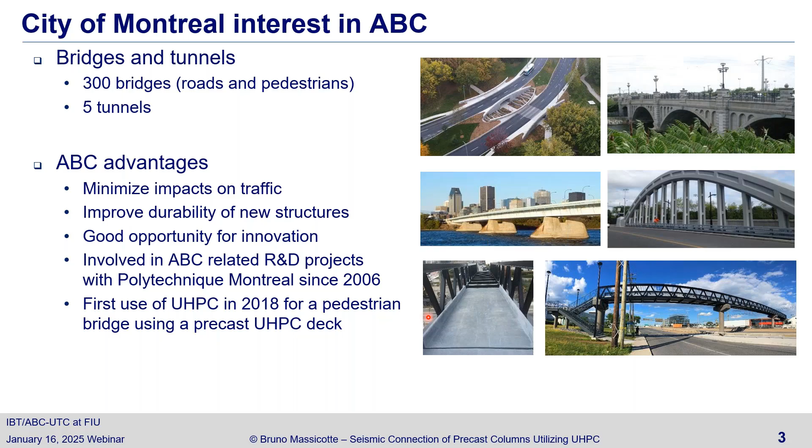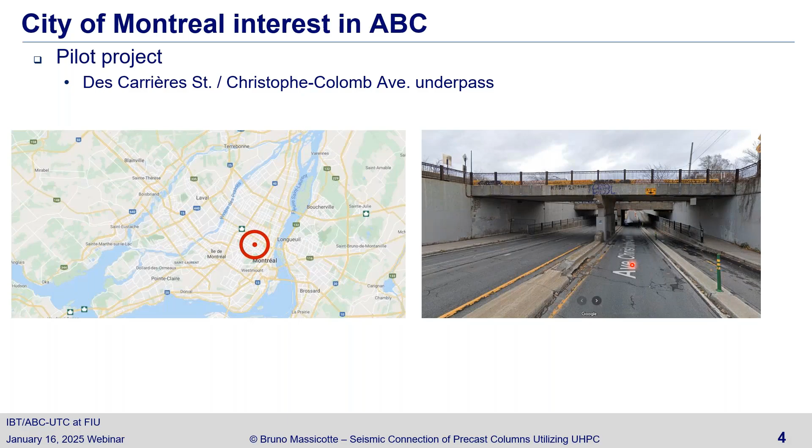So we decided that while replacing the bridge, we'd take the opportunity to review the configuration to make it safer for people. As you can see, it's one of the main roads that goes under the train tracks. In Montreal, the train tracks traverse all of the city, so this type of underpass, we have about 10 to 15 of those, and they all need repair. This was the first one we tried to replace.

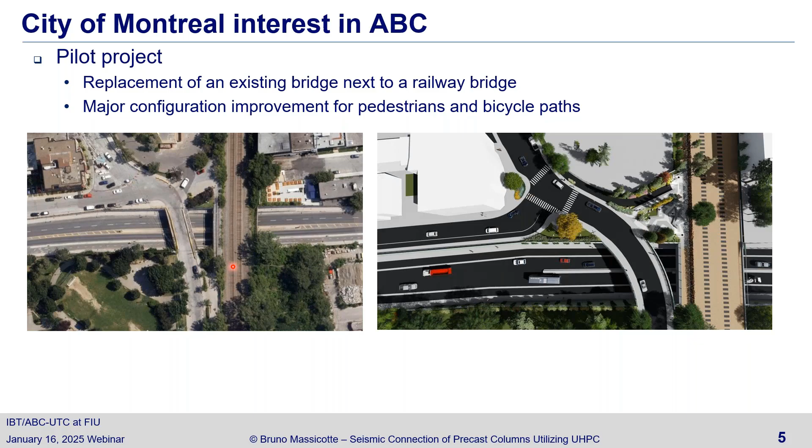So it's our first ABC project. As you can see, we tried to make it more beautiful for the people living in Montreal. It was all concrete and really degraded, so we did a lot of architectural patterning and tried to make it a more livable space.

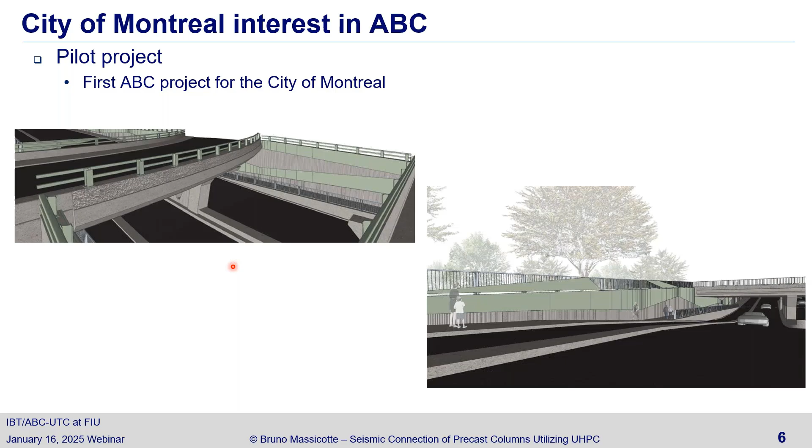When we wanted to do ABC Montreal, we decided to take that site. It's not a site with a lot of traffic problems. The roads end up near a park, so it's more of a local road, but it still represents what we're going to have to do with the other underpasses.

And we didn't make it easy, so we took a complex geometry, curved and skewed. We had a limited number of similar elements, so the precast elements were a lot of trouble. Also, we had low clearance of the roadway, so doing precast was really interesting to get better clearance. We wanted to do 100% ABC for the bridge. The abutment and retaining wall were kept, but the bridge was 100% ABC from footing to the barrier wall.

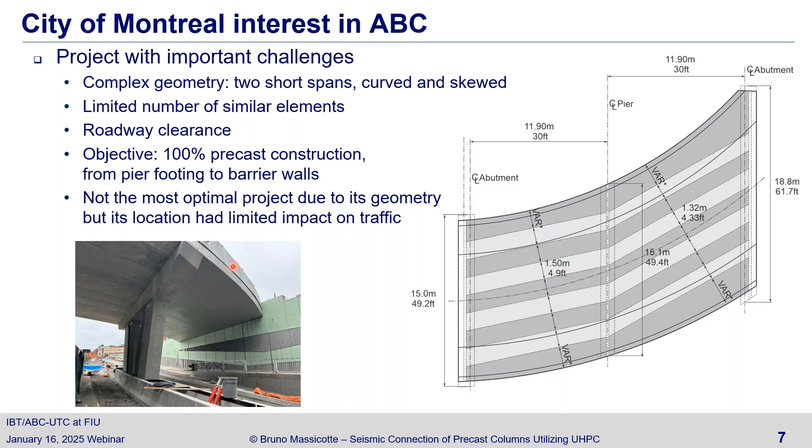That's it, and now I'm going to pass the mic back to Bruno. Thank you, Dominique. So, some background information.

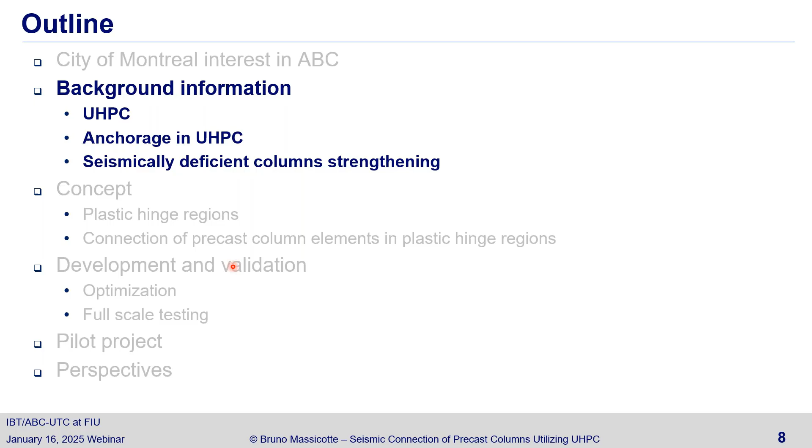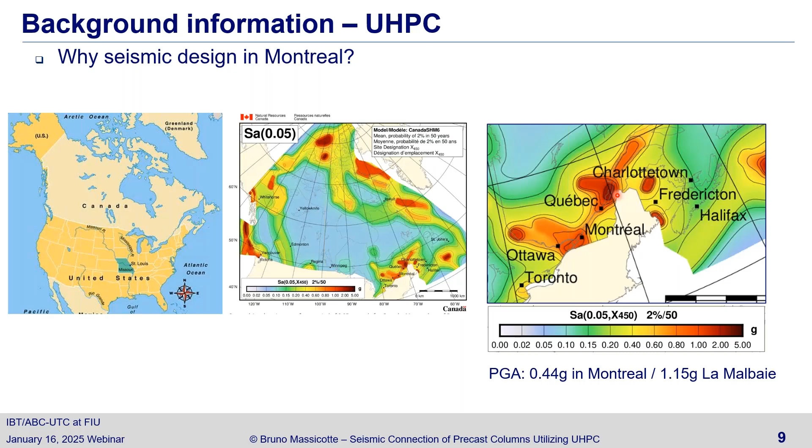That area can have very high seismic events. The return period for seismic is about 150 years in eastern Canada, and it's been 100 years this year since the last big one occurred, so we're getting ready for the next big one.

What is UHPC? For those who are not quite familiar, it's a cement paste in which we put fiber. The Europeans call it UHPFRC, which is the same as UHPC, the acronym we use in North America. Its main characteristic in compression is about 125 MPa.

I'll be switching from SI to American units, but I've put the soft conversion in many places. This is its characteristic in compression, but why do we use this material? Mostly for the tensile behavior, which is around 14 MPa, or 2 KSI, for a conventional fiber concrete, UHPFRC. For example, on this side, it's UHPC with 2% fiber content, so it can reach stress as high as 14 MPa, or about 2 KSI.

The beauty of that material is that if you look at the stress-strain domain, once the matrix cracks, you have a lot of strength and a lot of ductility. So this is what we're using.

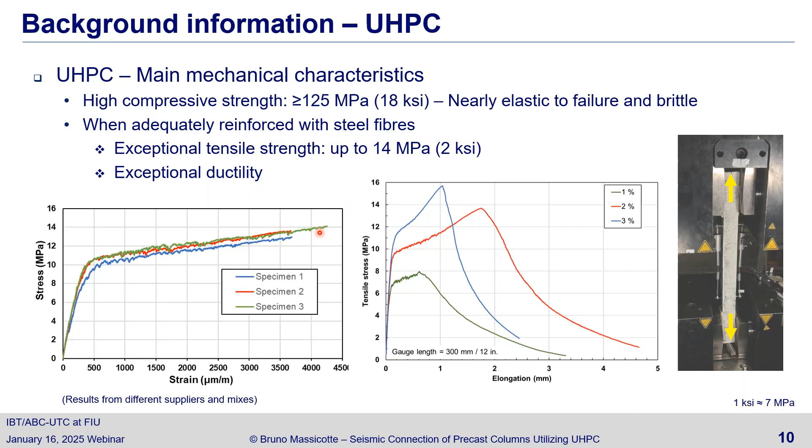If you pull on a series of bars in a joint where bars are lapped, that puts a lot of pressure on the concrete and induces cracking in the material. With UHPC, there's no crushing on the ribs here. It's mostly the tension of the material that governs the behavior.

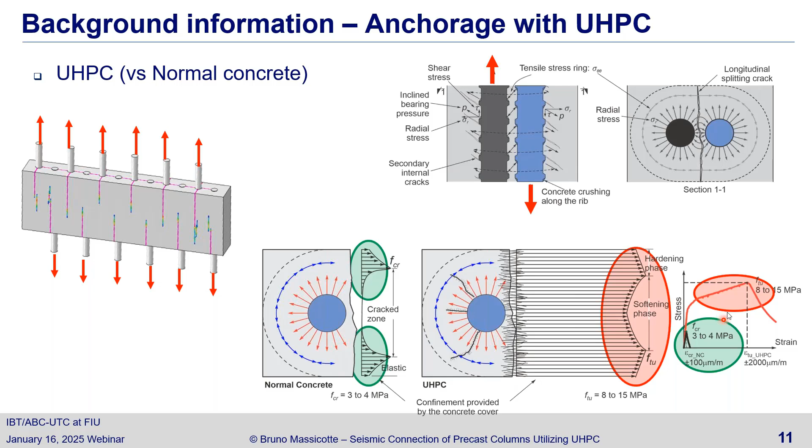If you look at normal concrete, you get little confinement or confining effect, because normal concrete has very low tensile strength. However, with UHPC, you get very high tensile behavior and ductility, which helps provide very good anchorage, significantly higher than the confining stress of normal concrete.

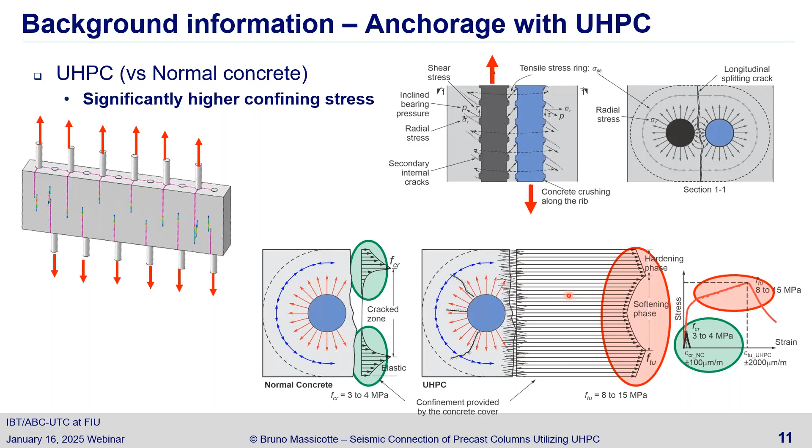So if you pull on a bar and look at what kind of stress you can develop, you can see that for an 8 bar diameter of anchorage, you can reach stress around 60 KSI, enough to yield the bar easily, and for a 10 bar diameter embedment length, you can break the bar.

So it's very efficient, and this is for conventional commercial concrete. It's not on the upper high side of this material.

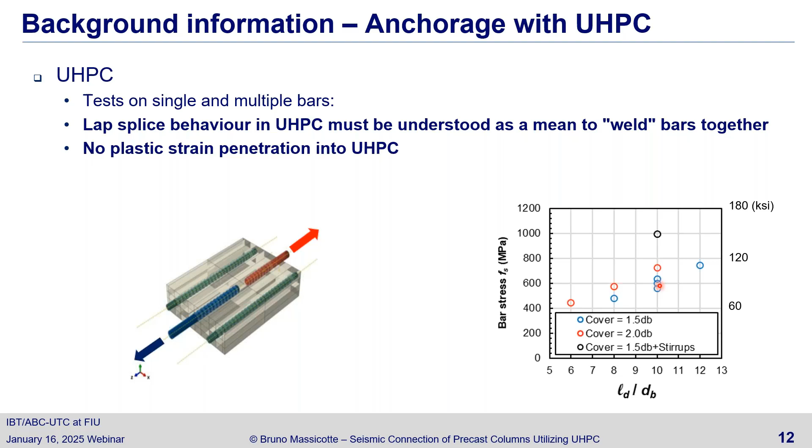So lap splice behavior in UHPC must be understood as welding the bars. If you put two bars lapped in UHPC, they're welded together. That's the way to see it. There's no plastic strain penetration into UHPC because the stress varies linearly and goes down quickly into the bar. So it's not like conventional concrete.

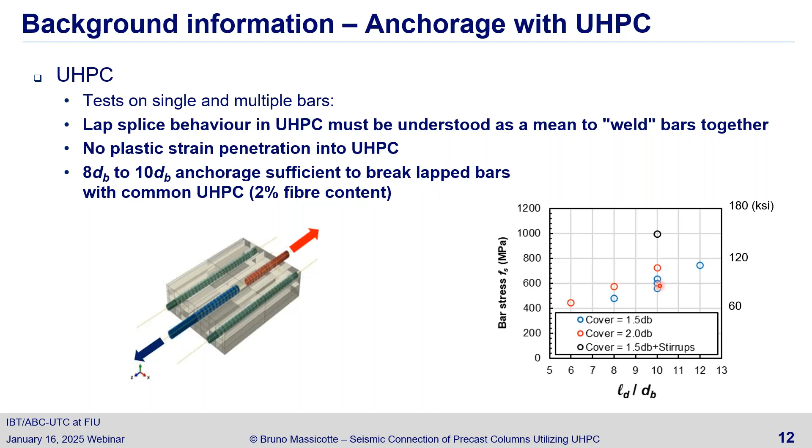As mentioned before, if you have the 8 to 10 bar diameter anchorage, it's sufficient to break a normal reinforcing bar with a 2% fiber content of a commercially available UHPC.

So that behavior, actually, before knowing everything that I had, about 15 years ago, I had the idea that it could be used to strengthen existing bridges where you have a bridge pier that would be very deficient for seismic behavior.

What I did was replace the concrete in the lap splice region, just remove the normal concrete and pour UHPC without modifying anything. Nothing, no additional stirrups, no 135-degree hooks, nothing like that, just replace and see what I got.

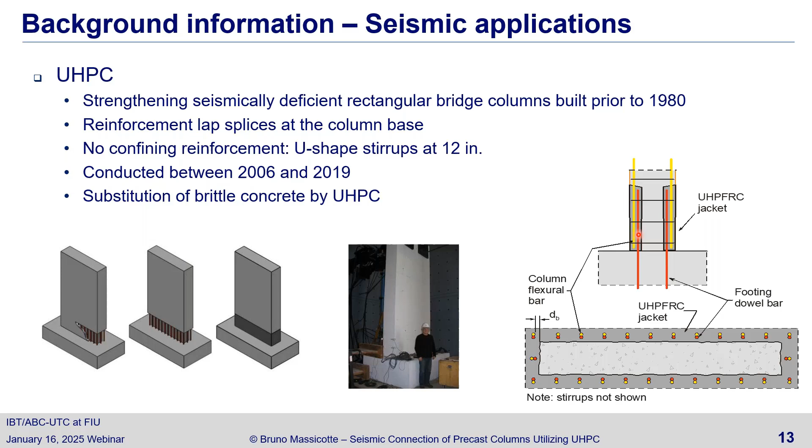And I got something. This is a control column in black here, and my first column in red. It was so good that I was not even able to break it because the actuator didn't have any stroke left.

In the coming years, I looked at the improvement given by UHPC on a lot of columns. However, in that project, I was using 20 bar diameter as lap splice length and 3% fiber content, so it was not optimized.

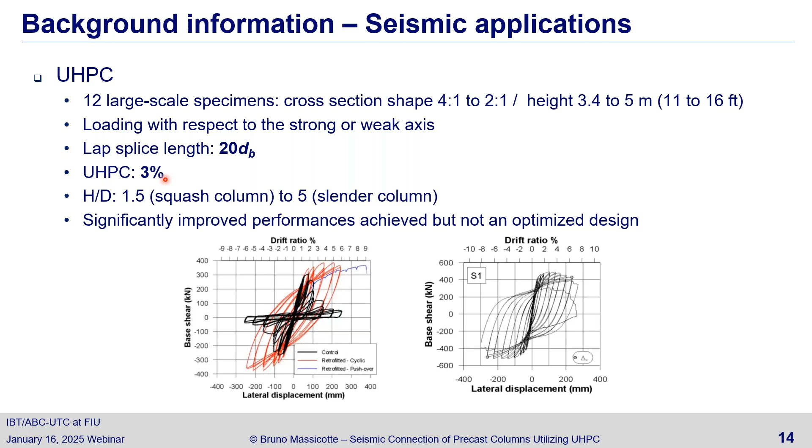So I thought, if it's working to fix a deficient existing column, could it be used for precast columns? So that was the idea.

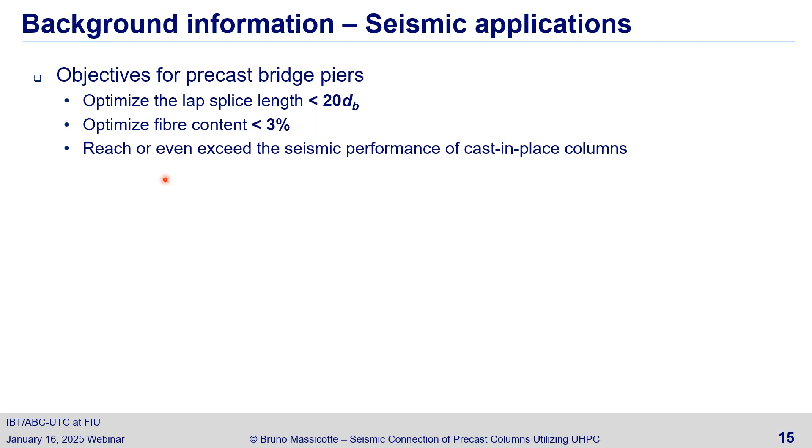So the concept is as follows: if you take a cast-in-place column, a simple column, and look at the behavior in the plastic hinge region, if you have a short column, the plastic hinge will be spread out half and half, half in the footing and half in the column.

This is given by this equation here, in SI units or American units. Roughly, the plastic strain penetration within the footing is about 10 bar diameters for conventional reinforcement. That equation is the one given by the AASHTO or NCHRP document to compute the length of the plastic hinge for calculating column behavior.

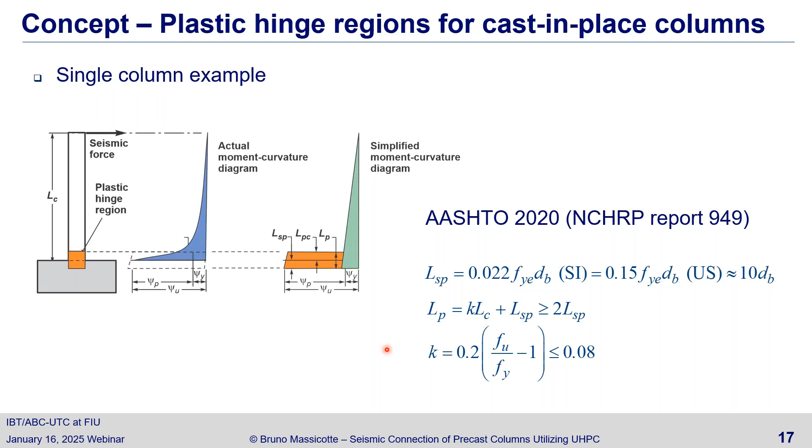Using that idea, now if we make a precast element in which the bars - the red bars here are those coming from the footing, replicating what I had for the existing column - and the blue ones are those coming from the precast element. They can be lapped in the same plane as shown here, or they can be offset if you want.

So when you do the design, you can choose whatever you want. Usually for an existing column, they will be in the same plane. For a new one, the offset will be preferred.

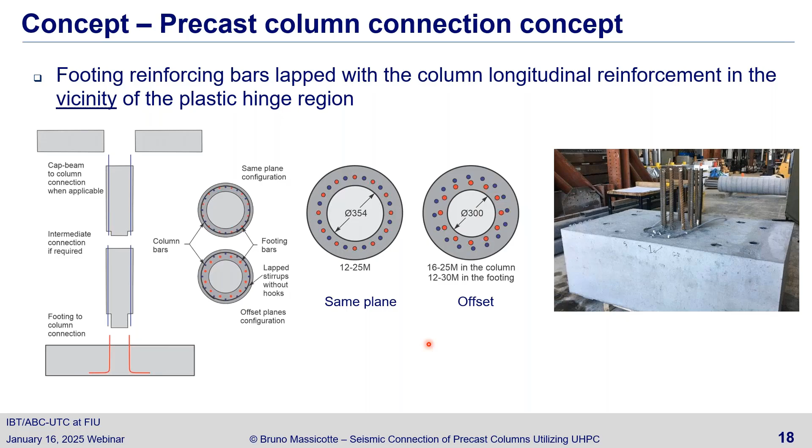So this is the idea, to lap the bars that way. As mentioned here, all the pictures are not coming from the same element, so you can see the bars are not exactly the same from one picture to the other, but you have the bars coming out of the footing here.

Then you put some hoops here, and you have your precast element with the longitudinal bars, and then you just put the two elements together and pour UHPC, and that's it. That's no more difficult than that.

One good thing is that with UHPC, since you can reach 400 MPa or 60 KSI with a lap splice of about 8 bar diameters, you don't need to use hooks at the end of your bars. So it makes the details much easier to put in place when you lap bars in UHPC, whatever kind of bar you have.

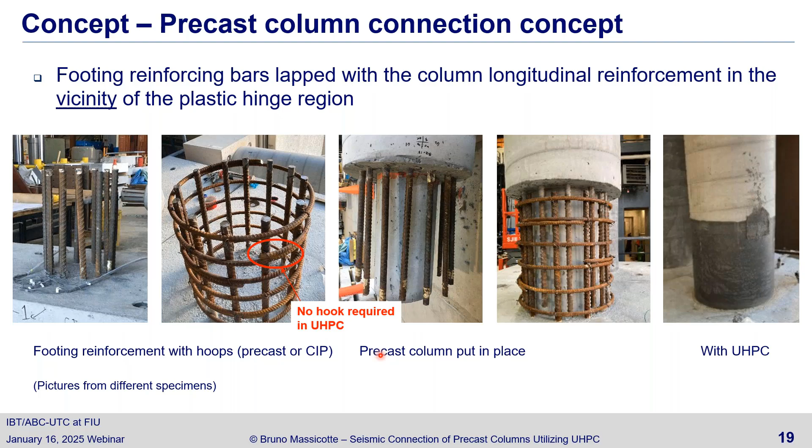So to follow the usual way of doing seismic design, you make sure that your ductile elements - the reinforcement at the bottom here in the footing - yields, and you get the ductility from that reinforcement. For the part of the column above the joint, above where the plastic hinge region would be located, those elements are protected. So for the same load level, you will remain nearly in the elastic regime, which allows you to do whatever you want for that element.

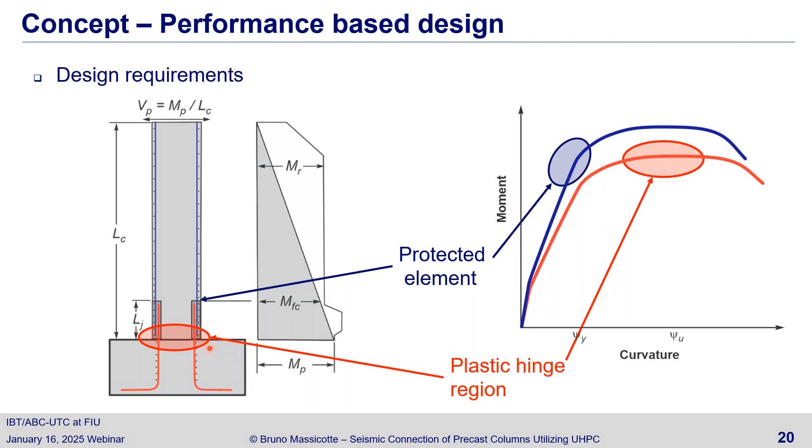You can use this as long as the element remains in this region, so you make sure that all the plastic deformation occurs at that location. Comparing the cast-in-place and the precast solution, the portion of the plastic hinge, the strain penetration within the footing, remains the same. If you need more, depending on the seismic zone and the displacement demand, you may have to extend the plastic hinge within the UHPC. However, as I said before, that cannot be done because UHPC has limited plastic strain penetration.

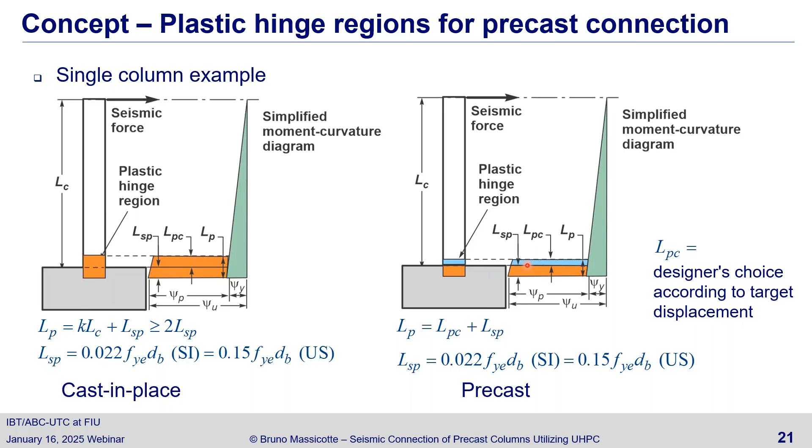So we have two solutions. If plastic deformation occurs only in the footing, this is the configuration you may have. But if you want more of the plastic hinge to extend above the footing, then you can use a sleeve and increase the length of the plastic hinge.

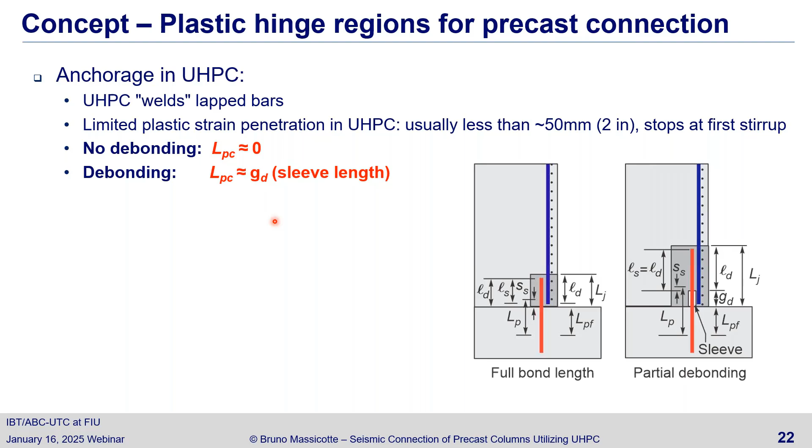Our experience says that if there's no debonding, when you do your computation, you assume there's no plastic hinge within the UHPC. If you use a sleeve, you use that length, and you can select whatever length you want to meet the prescribed displacement. As I said initially, this solution was not optimized for the strengthening of columns.

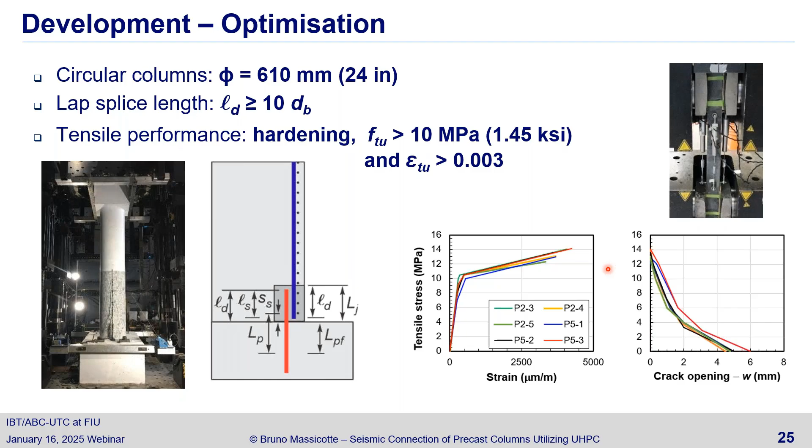We had a control specimen, and it took 4 specimens to optimize the design. So this is the result we're going to talk about. Just to say that these columns had an axial vertical load, and the percentage of reinforcement for that column was 2%, which is quite common for seismic application.

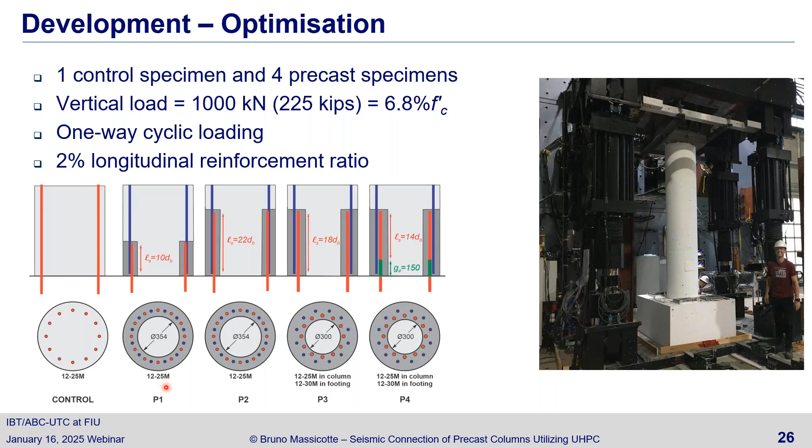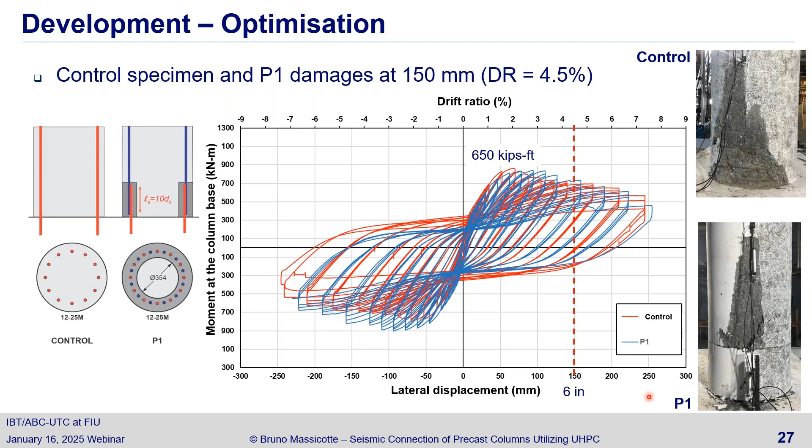Here we're showing the damage to the column at 4.5% drift ratio. We can see there's spalling in both columns, but that was expected. If you want to eliminate spalling though, I'm going to move to specimen P5 now, the last one we tested as a circular column.

In that one, we made sure that we used some sleeves just to see how they would behave, and we made sure that the plastic hinge would occur only in the footing region and within that sleeve, with no damage or spalling to the concrete in the precast element. That was our target, and this is what we got.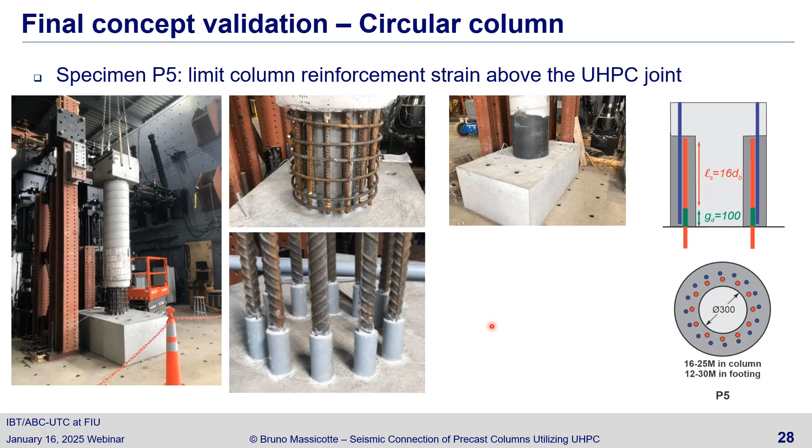This is the kind of behavior we got, again with the same control specimen. The amount of reinforcement was a bit higher for the P5 column, but in terms of behavior we got a very stable response up to a drift ratio of 5%, which was good, with very little damage as you can see here in the precast element.

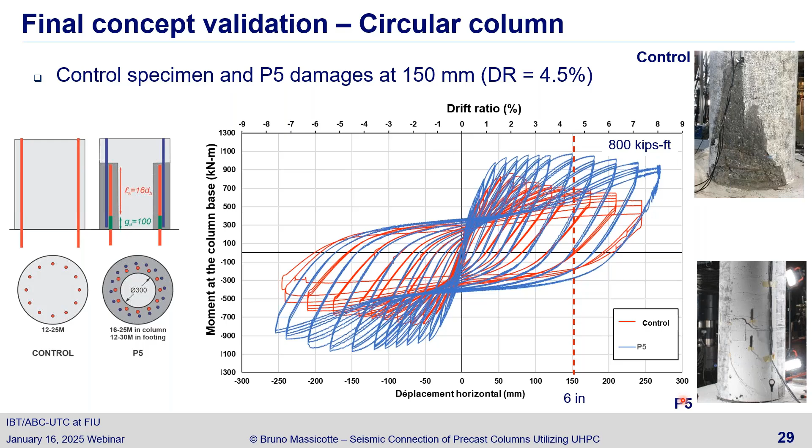If you look at the usual range for which you would design a column, and compare the damage between the control column and the precast one, there's no damage in the precast one. This means that after a very severe earthquake, with this type of design, if you carefully do your design, you will end up with no apparent damage, no crushing, no spalling in your precast element. You will concentrate all the plasticity and damage, with very stable behavior, into the plastic hinge region, hidden from view, so you will have a column that won't need repair.

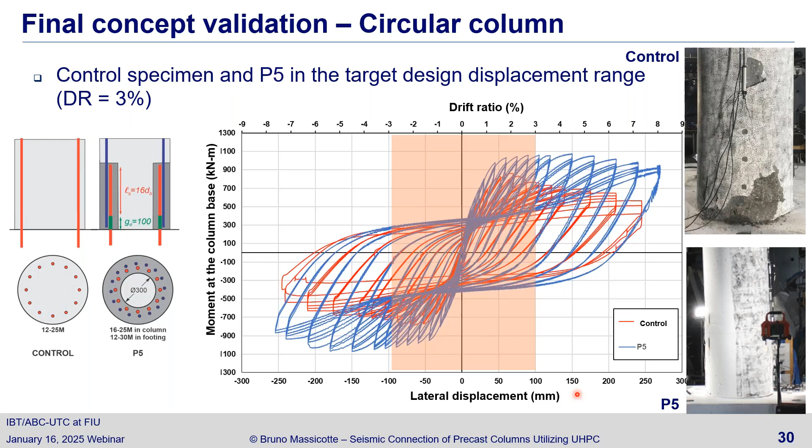The final concept was validated on the pilot project briefly presented by Dominique before. This bridge had some architectural features, because Christophe Colomb is Christopher Columbus, who sailed to North America.

So the architects thought some sails would be nice. They're not structural, and even the columns are too big for that small bridge, because you need a column sized to look robust, but actually they're a bit too big for the size of that bridge.

The specimen tested in the laboratory was actually designed for a bridge more than twice as long as that bridge, a much bigger bridge. So the columns we tested had capacity for seismic design for a much larger bridge.

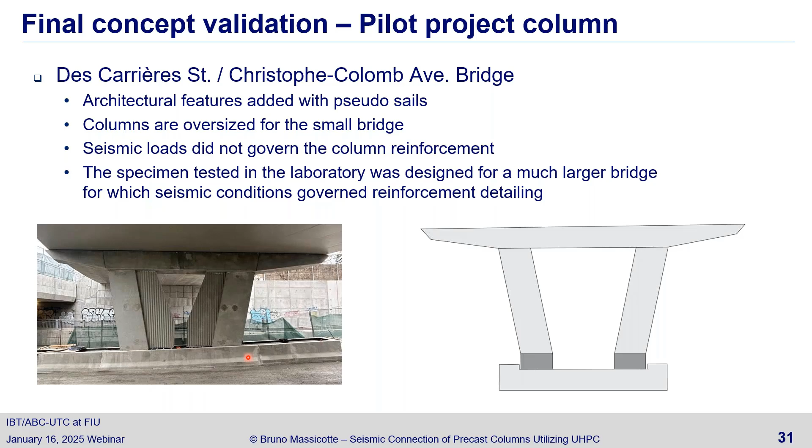Because of the size, this is about 20 feet here, where the lab space is a bit less. So we tested a column that was somehow close to half of the actual column size.

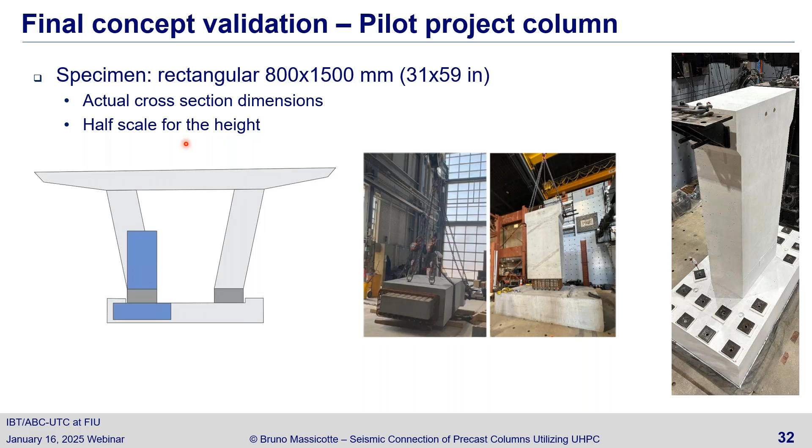But we kept the same dimension, the same size of the column. So this is what we see here. We had bars coming from the footing in red, and bars going into the column, so all the yielding and nonlinear behavior will be in the bars coming from the footing.

We also used sleeves here just because the column we tested was not exactly the one that was built. It's actually much stronger in terms of seismic behavior, and because we kept the same length as the designer, it was 18 bar diameters, which is a bit too much, but we kept that value for the testing.

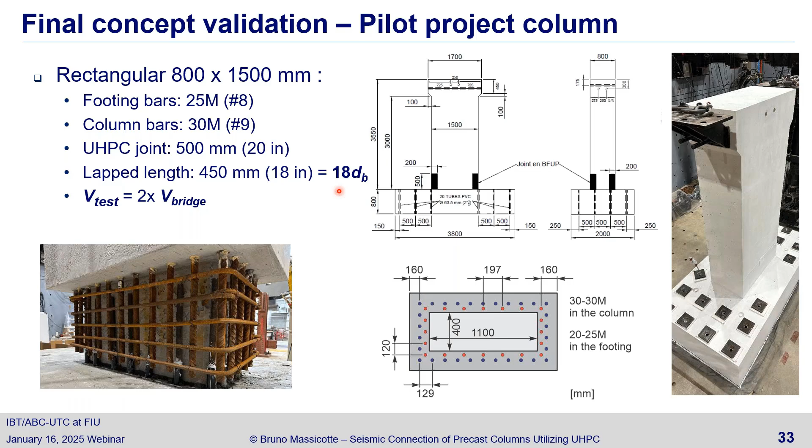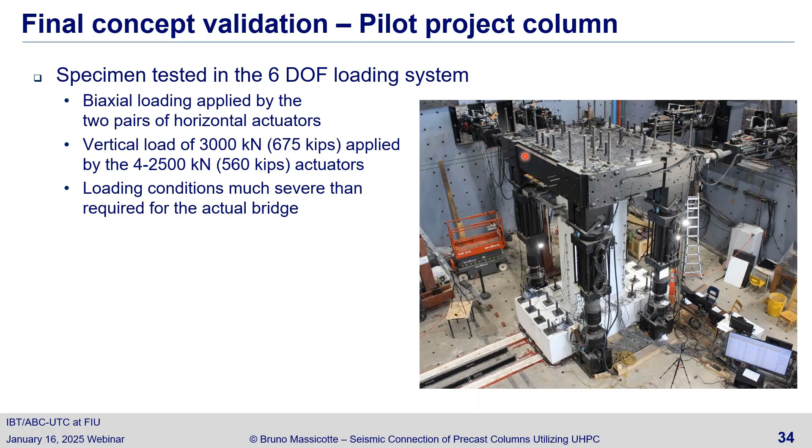So it was tested again under axial load and load coming from two sets of actuators. It was tested in biaxial loading for that bridge site. And here I'm showing some behavior of the column during the test.

The test lasted about 6 hours. We don't work that fast, but you can see that we went to displacement much higher than those required for the pilot bridge, something that will be good for a bridge of much bigger size.

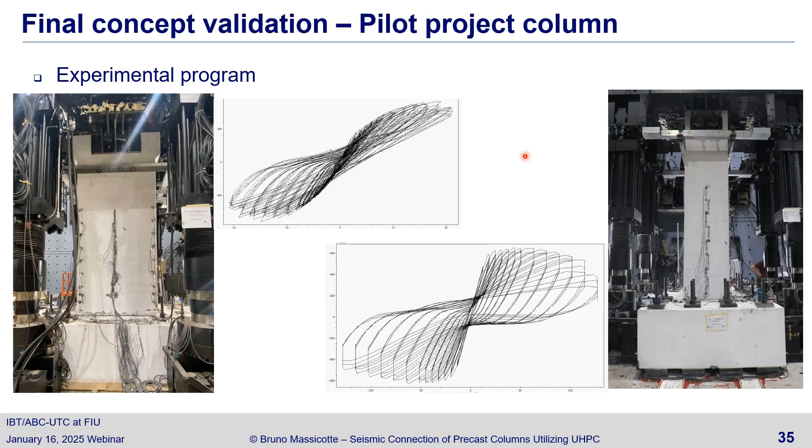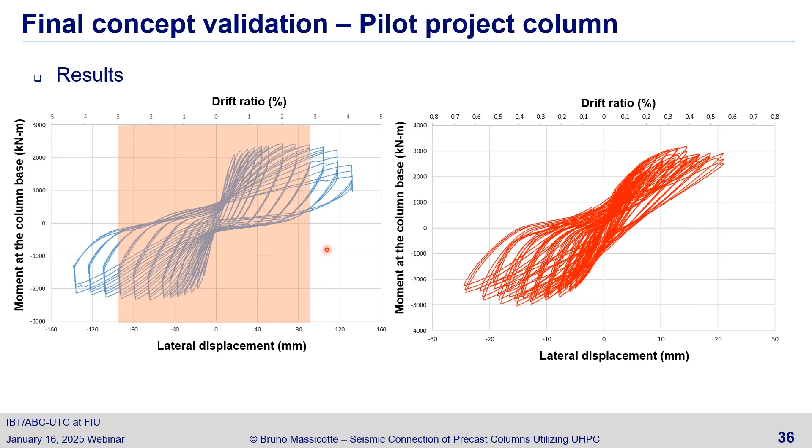The behavior was quite good in terms of drift ratio, and the behavior we got in the longitudinal direction, under the weak axis direction, was a very ductile column. And at the end, although we pushed the column quite far, no damage could be observed outside the column.

So it was in pretty good condition, and at the design displacement, there was no visible damage to the column.

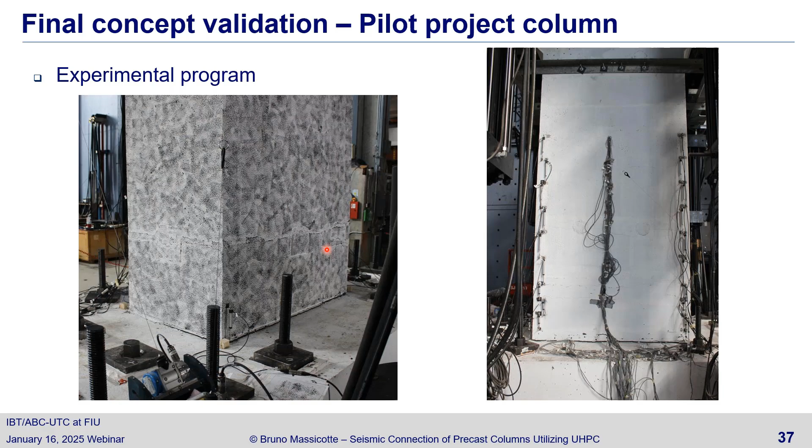So did it go well? Because it's UHPC, and filling the joint, we've done a lot of UHPC mixing in our lab for many columns, many big projects, and in that case we had, you can see the detail.

This is the void that has to be filled, and we had 4 entry points here, so that you can put UHPC on one side and then it flows to the next side, so you can make sure you fill it up to the top.

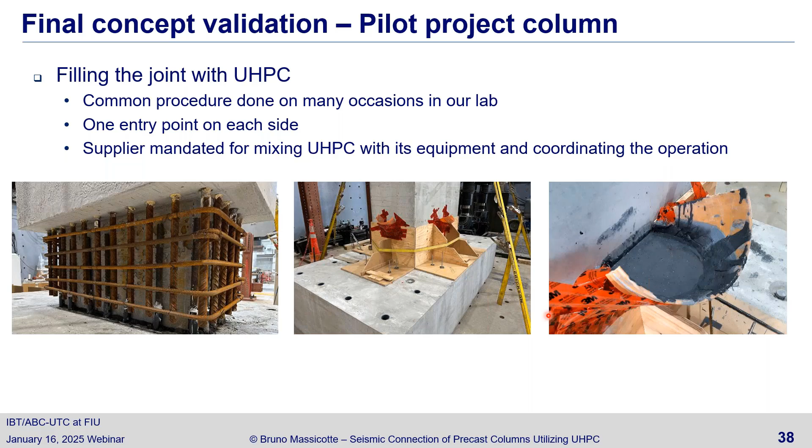So this is what we did. We asked a UHPC supplier to come and use its equipment and personnel to do the job. It didn't go very well, actually.

It was probably too hot that day in our lab, during summertime. It could be very hot in Montreal during summertime, so the mix was becoming more viscous as the casting proceeded.

At the end we were not able to fill the specimen, so we were quite sad in university. But on a bridge engineer side, I would say it's a good thing that things don't always go well.

So we demolished it using jackhammers, removing the UHPC so that we could fill it again. The next batches were done by our own staff, and we were able to repair that bridge and that column.

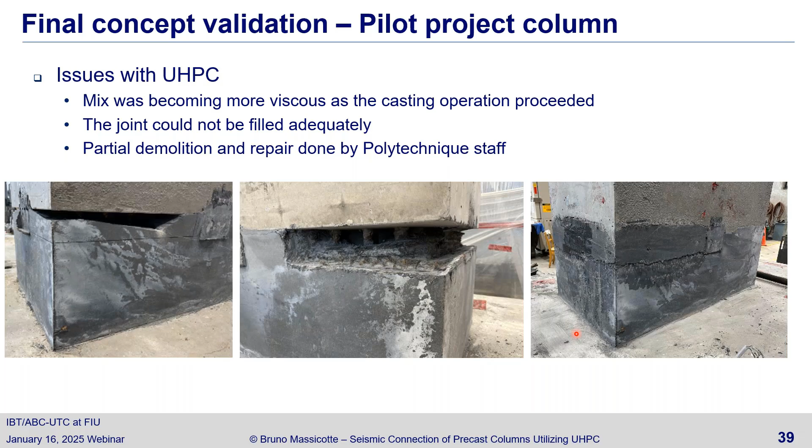So it went well. Now I'm passing the mic to Dominic for the pilot project.

Hi, I'm going to put some project context on our first ABC project using UHPC. It was planned on a 2-year span, not because of the bridge construction or the ABC method, but because it was a complete project. We had to refurbish all the retaining walls, do the aqueduct and sewer, and rebuild the roads.

So it was a 2-year project. Since it was our pilot project, we wanted to put as little pressure as possible on the company doing the project. At the end, when we looked at how many days it took to build the bridge, we estimated about 38 non-consecutive days, compared to another bridge we built as cast-in-place that took 85 days. So we had almost half the time to build it, which was really faster.

I think that was one of the things we wanted. One context of the project is that the Canadian code requires the UHPC to reach 14.5 KSI before it can be subjected to load, and that added a delay of 15 days of maturation for the concrete. So that's one of the issues.

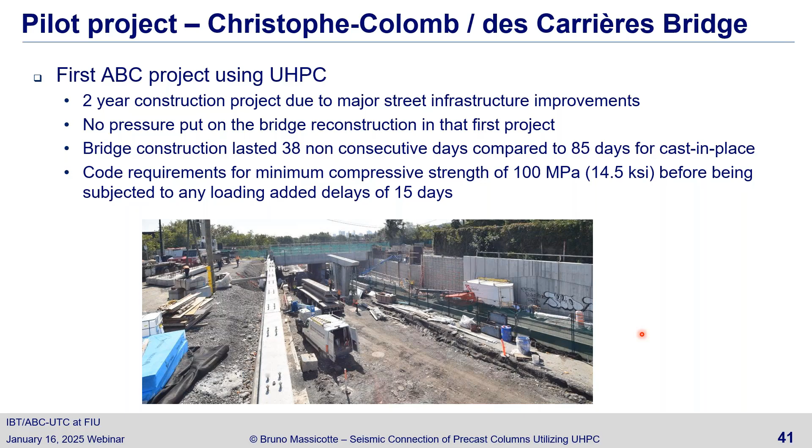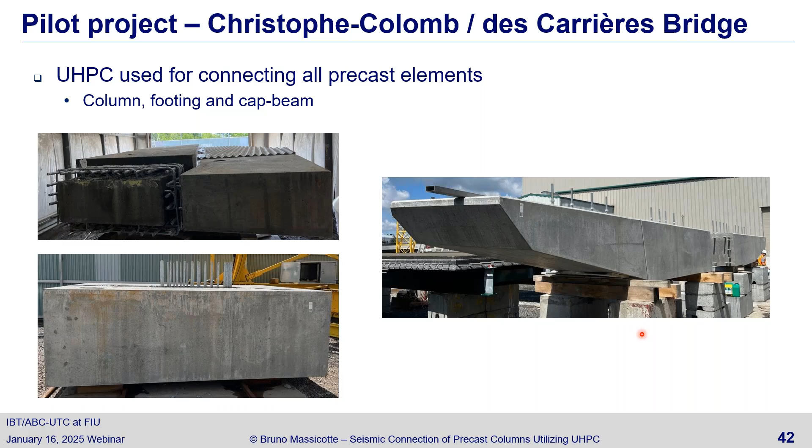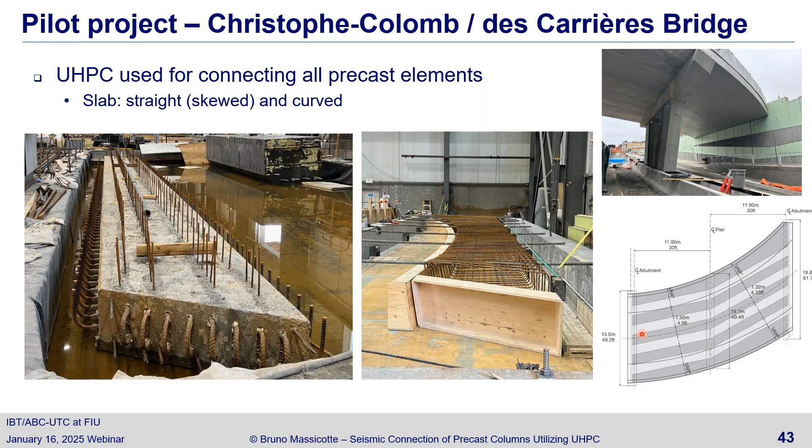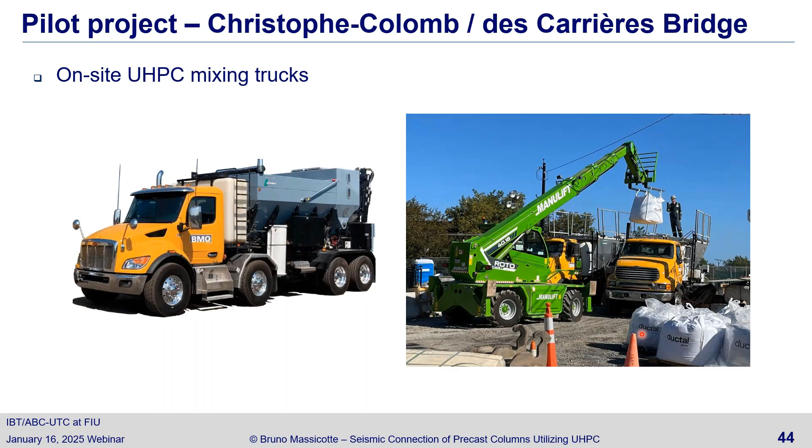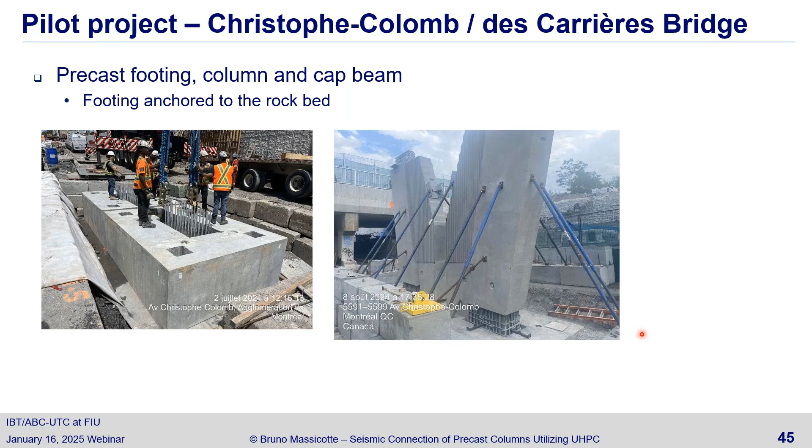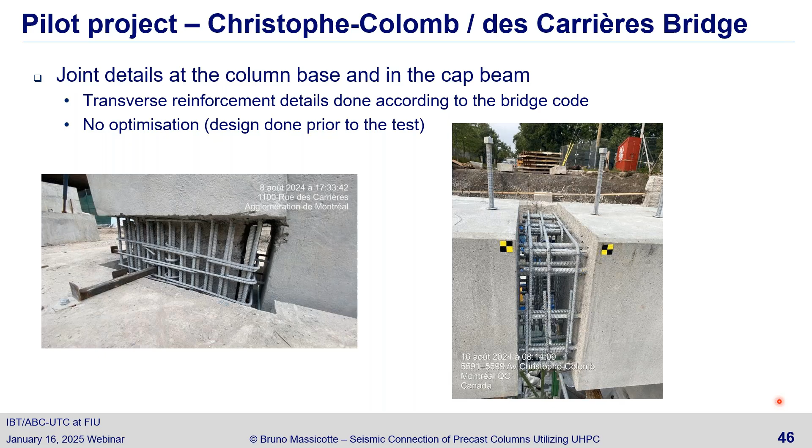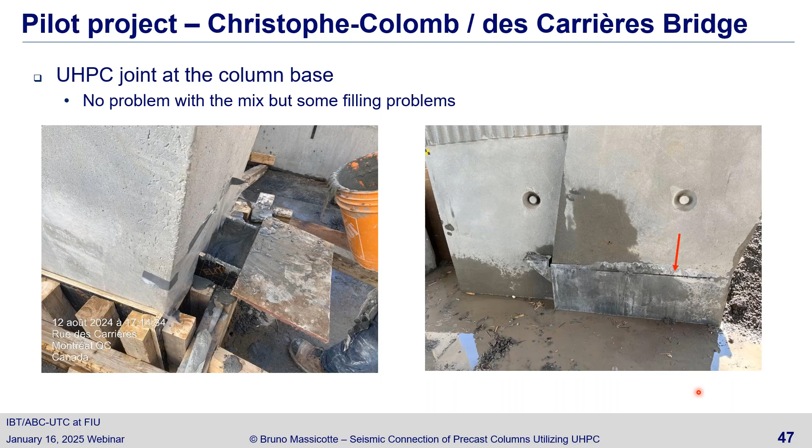So it was less of a problem that we had in the lab, but we were ready for it since we already had the problem before. Next slide, sorry.

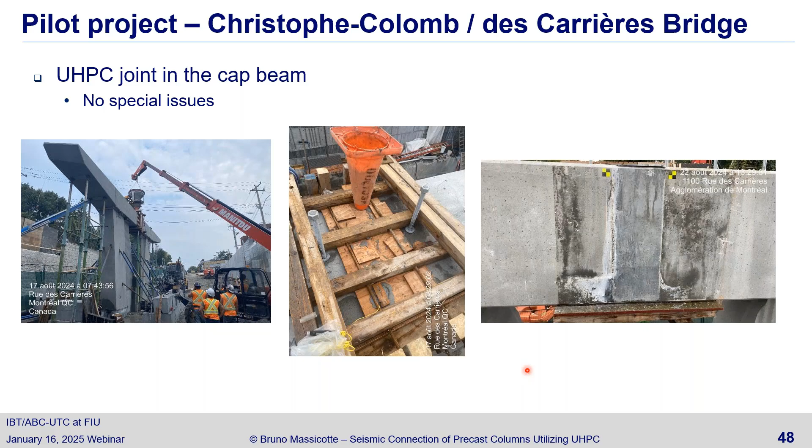Now that the pier cap and column were built, we put in all of our precast slabs and brought them in. I was saying we decided to go piece by piece because it's so dense in Montreal. It's not possible for us to build the bridge and slide it in, so we really go for all precast pieces. Now we connected all those elements, next slide.

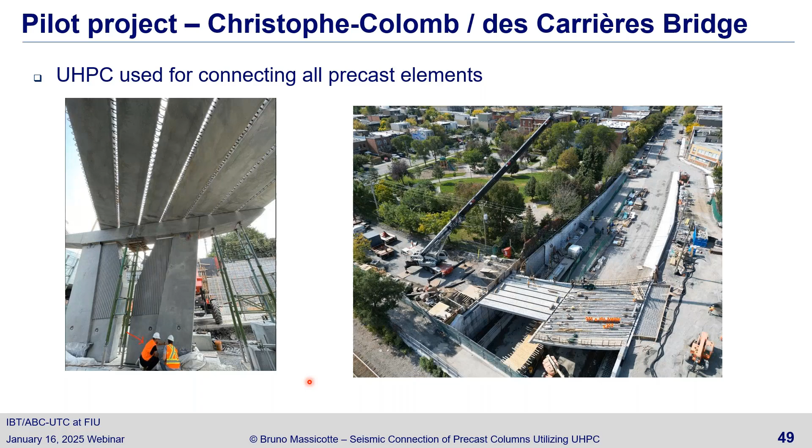As you can see, you got to make your form tight, watertight, so that UHPC doesn't flow under the bridge when you pour it. We also used a method we saw used in the United States, for example in FHWA and AASHTO publications, where the joints were cast with a form on top and with buckets.

So we filled the first bucket. When it gets to the second bucket, we fill it again, and we go from one end to the other, making sure it overflows everywhere so that the UHPC is everywhere.

One of the problems we had, regarding the big bags of UHPC stored in the sun, is we started the first pour around 6 o'clock at night. The temperature had already dropped in Montreal, but the UHPC bags were still very hot. So the first pour was really thick, and we got quite scared when we did it. But it flowed, and we got to the next bucket.

As time went on, the temperature cooled, and the big bags cooled also. Afterwards, it was much, much easier to pour the UHPC in the joint. So that's one of the things you got to take into account when you do that kind of project. Next slide.

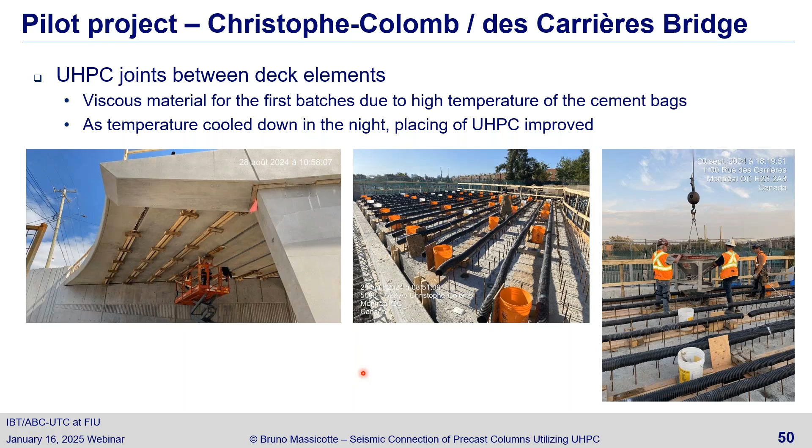We also put in all precast barrier walls. We did a lot of design with UHPC in bridge barrier walls with Polytechnique, but in this one it was more standard barrier wall that was put in place and tied down. Afterwards, because it was a curved bridge with a good slope, we cast in place an overlay and the sidewalk. At that time, everything under the bridge was open.

So we really opened the road underneath pretty fast. That's what we're going to do in the next project, because we have a lot of projects coming with more roads that have a lot of traffic. So we're going to build the bridge really fast, and with those methods, we can open the road really fast underneath those bridges.

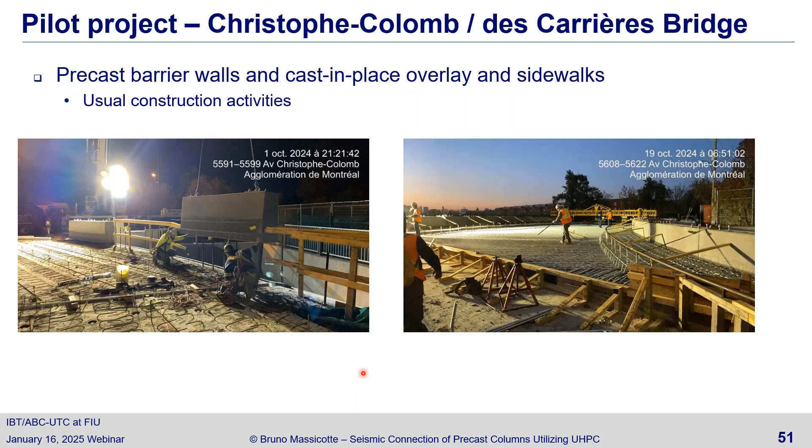Next slide. As you can see, at the end we have a lot of finishing, surface finishing to do. We want it to be nice, so we put some paint on. We sandblasted and painted the bridges.

So it's one of the big concerns. But the good thing about the silicone anti-graffiti is it makes the surface uniform and gives a bit of a wet look. It's not too much, but it turns out really nice and easy to clean afterwards. Next slide.

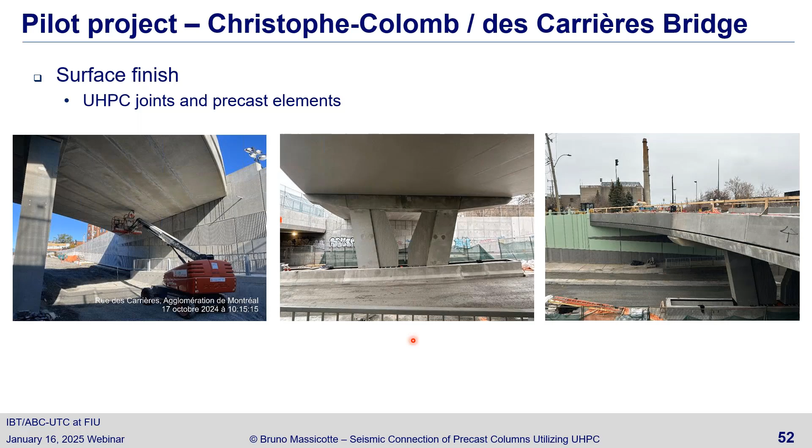So when we're at the end of our project, we learned a lot, and it was a project that was a success. We were able to precast everything, bring it to the field, and join everything with UHPC. But there was still a lot of questions on site, and a lot of, how do you say it, DIY. We had to troubleshoot a lot of things.

So for the first project, having no pressure to open the bridge really fast was really, I think, the way to go for us to learn and to have time to solve all those problems. It's a really good step on the learning curve.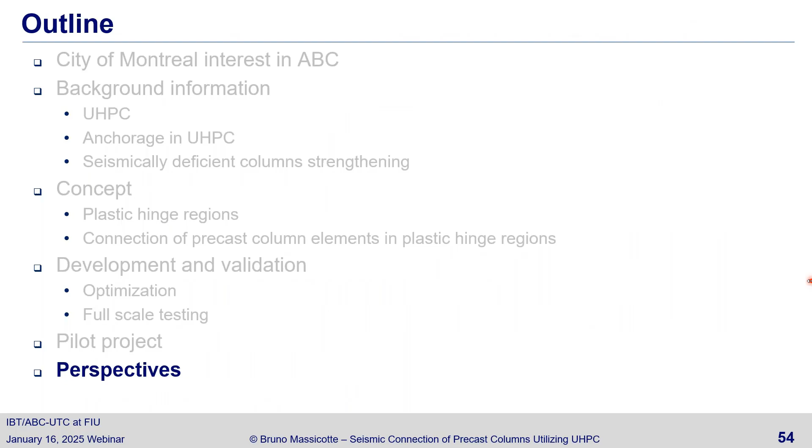Thank you, Dominic. So to finalize that presentation, on the technical side, UHPC lap splice regions for seismic application — I think what we have learned over the last 20 years or so, and particularly the last few years for ABC, is that all design principles are well managed. Publications are coming, but I think we're more on the validation side — validation aspect — if someone wants to test something else or design something else, and the equations and methodology for designing are coming.

It's not in the code yet, but the knowledge is there, and I think at least for that type of ABC application for bridges - accelerated bridge construction - we're more at the validation stage now. As I mentioned, anchorage in UHPC is something for which there are no equations yet, but the work we've been doing in parallel to those full big column projects has led to a lot of research about how anchorage and lap splice work in UHPC. That is well managed now, and publications are coming as well.

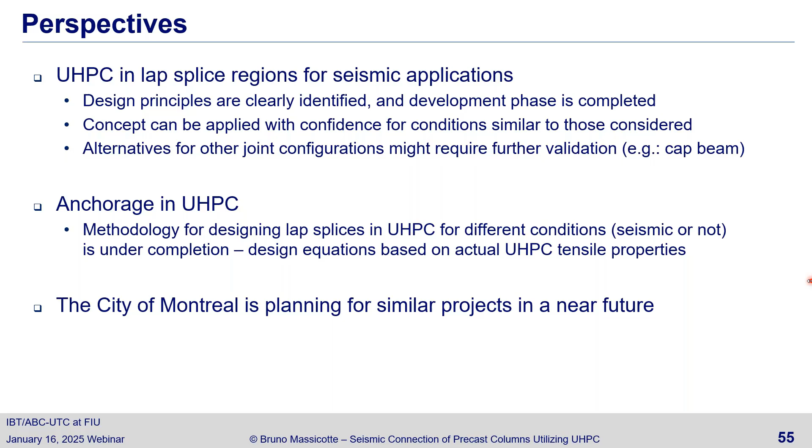So as Dominic mentioned, the City of Montreal is planning a similar project in the very near future. On the research side, I'd like to acknowledge the supporting agencies and companies who helped us bring this project together, and of course all the people who worked on it, many graduate students and people from companies.

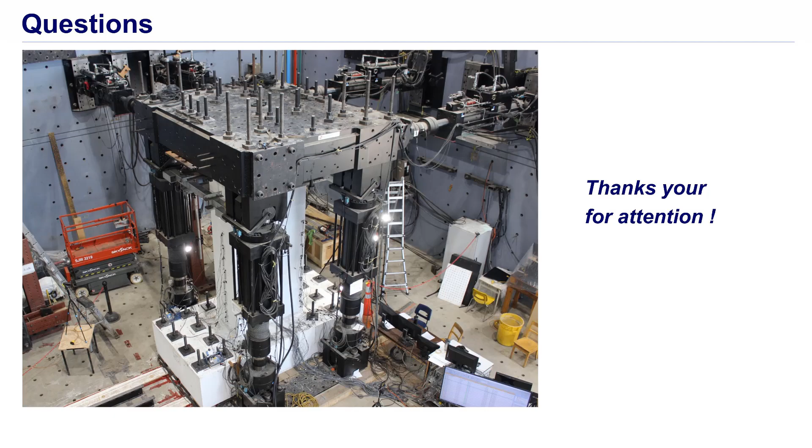Could you use vibrators or vibrating forms to eliminate voids in the UHPC joints? Well, yes, you can, but you have to be cautious not to over-vibrate it. Usually with a good mix design it can flow, and you let it flow. However, sometimes in our lab the UHPC can become too sticky, too viscous. You can put a vibrator nearby, or put a needle not into the formwork but into the cone where you pour the concrete, just to give slight vibration, and you see the UHPC start to move. Don't over-vibrate - just give it a swing, shake it a little, then let it flow. The more it flows naturally, the better. You don't want segregation - if you vibrate too much, the fibers will just sink down into your mold.

For this project on the bridge slab, we had some slight exterior vibration from underneath, but just slight. We didn't want segregation, but at times we saw the flow slowing down, so we put some energy back with a bit of vibration, just a little.

Okay, this next one's a little bit long here.

Can you describe the material quality control measures used for UHPC in your projects? What fresh property tests are performed to test for a quality mix? And finally, are there any tests performed afterwards other than a compression test?

You want to talk about that project? I can answer about what we do in our lab. In that project, the quality control, as Dominic said, was not the best, but what we suggest, what we do in the lab...

In our lab, when we pour, we make sure that the workability, the fluidity is right. We follow what the FHWA has written in their documents, and the Canadian standards are the same. We follow what's in the code so that you get good workability so that you can pour, and usually it flows slowly, but it does flow. So this is for the wet mix.

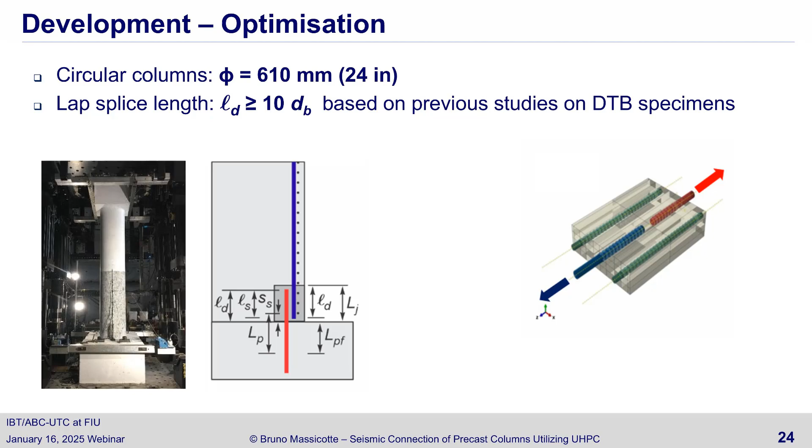So it's either anchorage like the DTB test, and I could provide - Quebec Ministry of Transport is implementing that type of test to pre-qualify mixes now - and this test could be done, you just have to make a few of those tests in your trial, when you do your mock-up, prior to doing those tests, and that will tell you if the UHPC you have is the right one.

Were there any tests you did after it was poured, other than the compression test? Well, like Bruno said, that's what we're going to do in the future. What we did in the field is we tested for workability. Also, we tested for the mass of fiber that we put in the mix, because it was with an on-site truck, so we tested the amount to make sure we had the prescribed amount of fiber.

Afterwards, we took some concrete specimens to test for compressive strength. But at the start, as the project went along, we also took specimens for anchorage and some bending. Now we're going to work with Polytechnique to transfer the technology from university to our city lab, so we're able to make it in-house, test those, to be able in the next project with a mock-up to test before we pour that the material we use is the same or has the minimum tensile strength that we want in design.

So it's like concrete - you want to have a column with 35 concrete, you're going to test it. If you want some tensile strength, you've got to test it. So we're going to implement it in our next project next year, and we're going to test what we add at that project at the same time, but we haven't had the results yet.